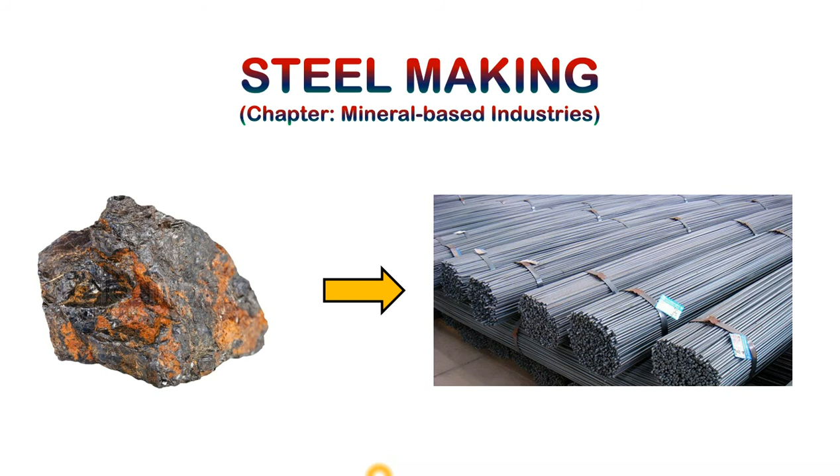Along with iron ore, some other raw minerals are needed for steel making that we will see in the coming steps. So steel making is done in the iron and steel industry. The iron and steel industry, as you all must be knowing, is the backbone of any country's industrial development, because this industry produces the iron and steel which is used by many other industries. So the iron and steel industry is said to be the backbone of industrial development in any country.

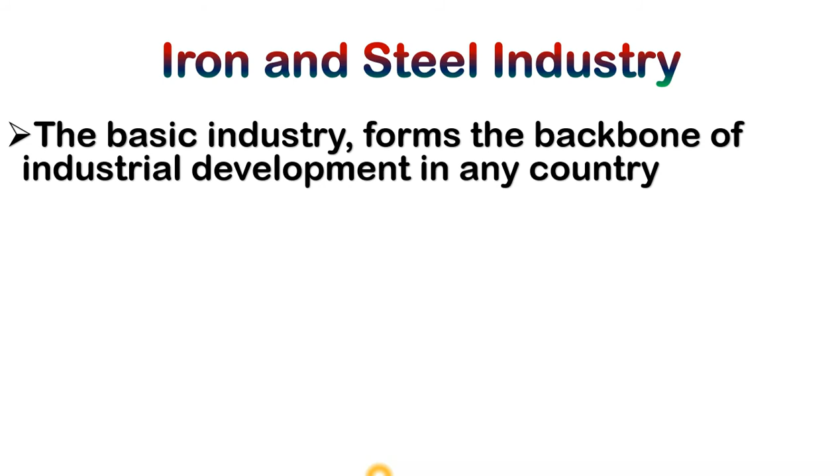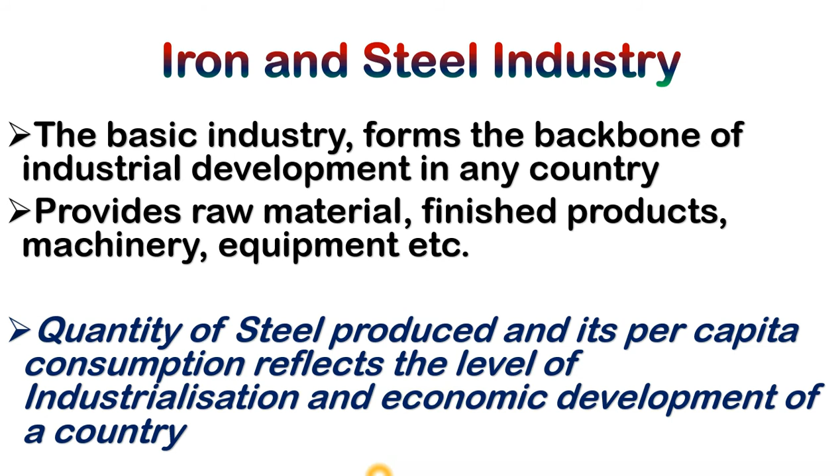So the iron and steel industry produces steel and iron products. Some of these are used as raw material in other industries. Some of these are finished products. Then many of these products are used for making machineries, equipments, and our day-to-day useful things, right? So the iron and steel industry is the industry that produces steel out of its raw material.

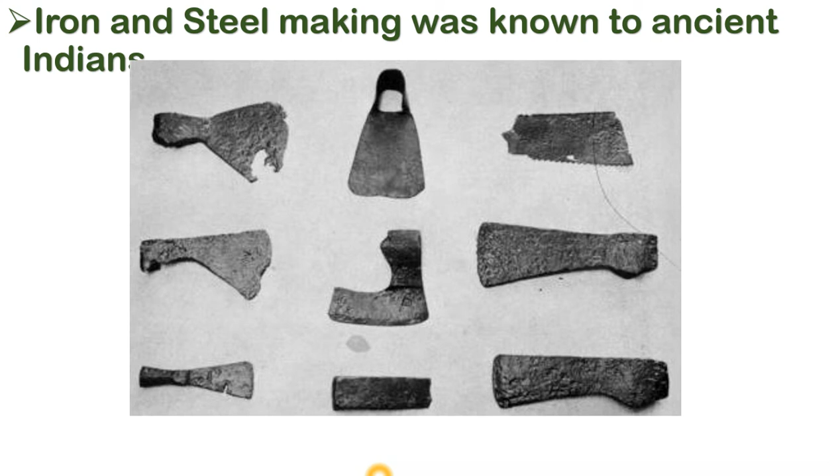Now, when it comes to steel or iron production in our history, ancient Indians, or people in some other civilizations, were also known to have used steel as well as iron products. Even though steel was not there, people were using iron equipments and machineries earlier. And during the Gupta period, we had iron pillars in North India, like the one in Delhi, at Qutub Minar.

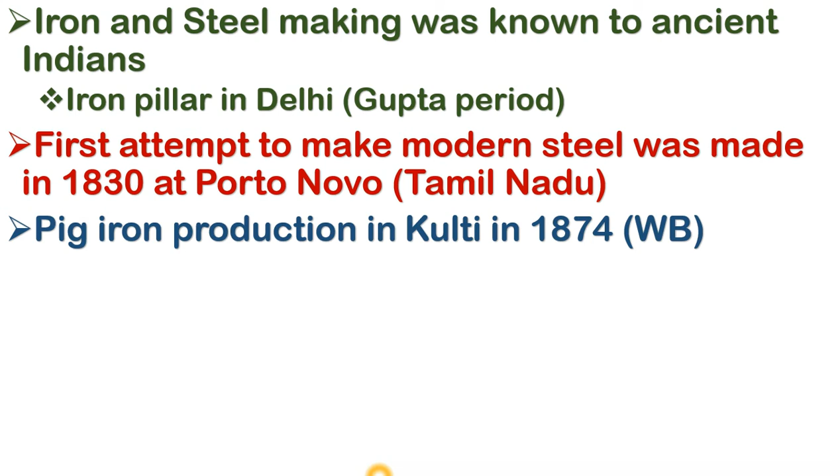And in 1830, one of the earliest modern steel making attempts was made in Tamil Nadu. Later, in the year 1874, pig iron production started in Kulti in West Bengal. And one of the earliest steel plants in India was set up in the year 1907 at Jamshedpur in Jharkhand. And presently, India is one of the largest crude steel producing countries in the world.

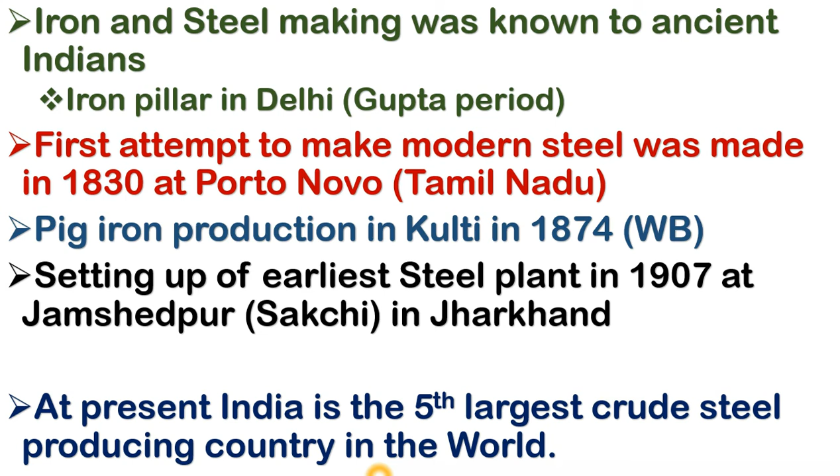Now let's see what are the raw materials required for steel production. There are a number of different kinds of raw materials required for producing steel, and the major raw materials include iron ore, manganese, limestone, silica, chromite, feldspar, scrap iron, flux, and fuel. Along with these, a little bit of manganese is needed for hardening and removing impurities. Then chromite, nickel, and tungsten are used for galvanizing. Galvanizing is the process by which steel or iron is made rust-free.

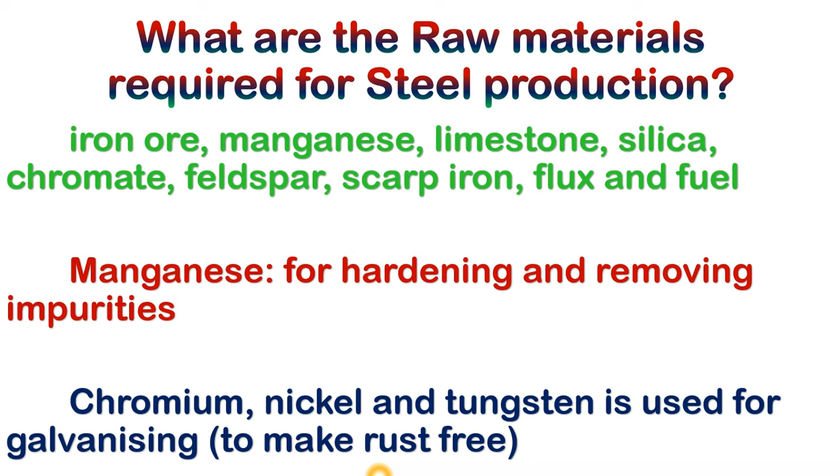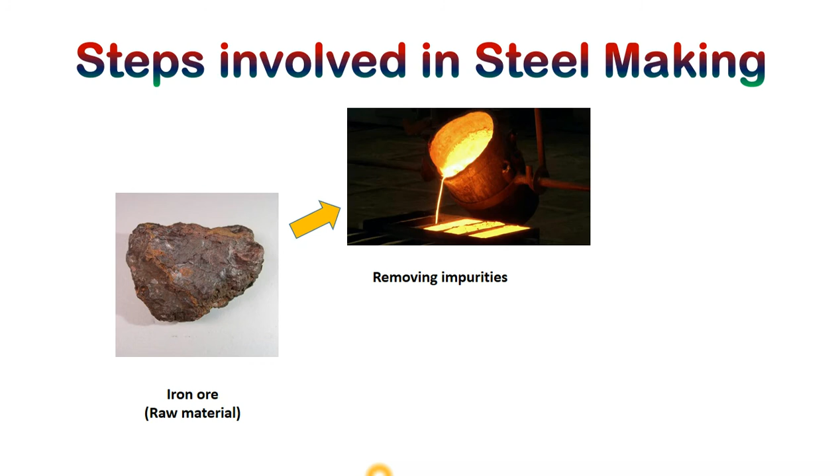Alright, so these are the raw materials required for steel production, and the production process includes three steps. These are called ore reduction, steel melting furnace, and rolling mills. Let's see what these steps are. The first step is ore reduction. From the name itself, you will get an idea. Ore reduction is nothing but the process by which ore and other impurities are separated.

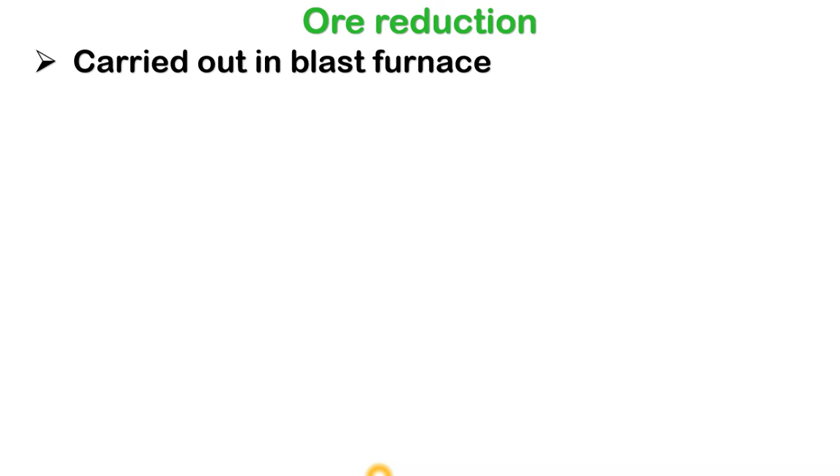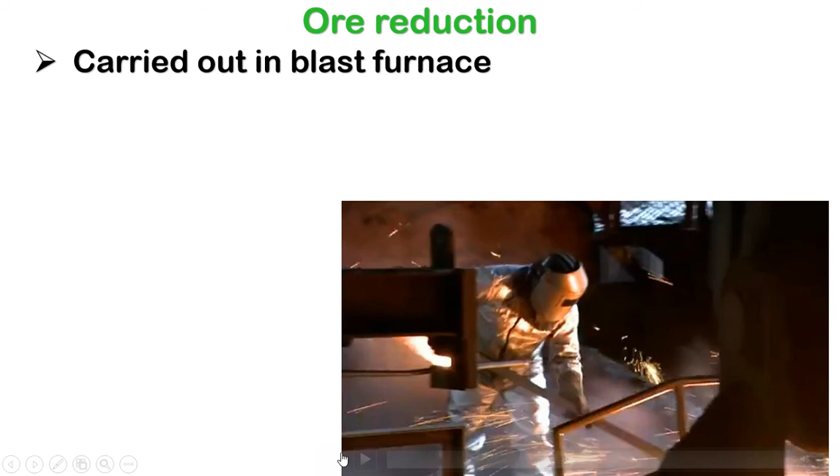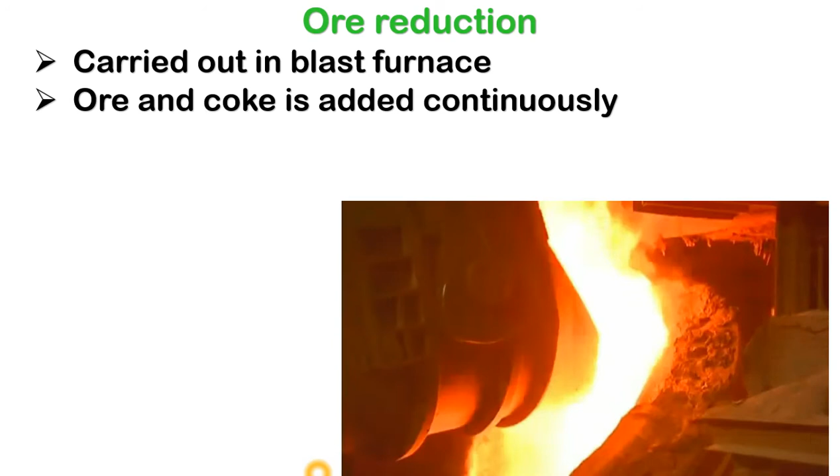So in this process, what is actually done in the industry is the iron ore is crushed into very tiny particles, small pieces. Then they are taken to a blast furnace. A blast furnace is a large container in which this iron ore will be melted at very high temperature. While melting iron ore, other ingredients are needed, like coking coal, and a little bit of limestone and dolomite is added as flux to reduce the melting point. So there are a lot of chemical reactions happening inside the blast furnace. Through this process, iron ore and other impurities are separated.

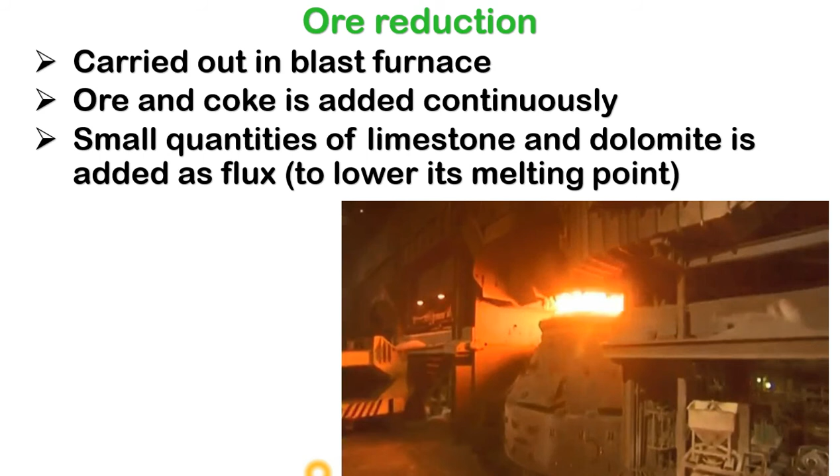So as you can see in the third sentence, limestone and dolomite is added as flux. Right. So when limestone and dolomite is added, the melting point decreases, and slowly that leads to the separation of impurities. Impurities will float on the top. That is what is called as slag.

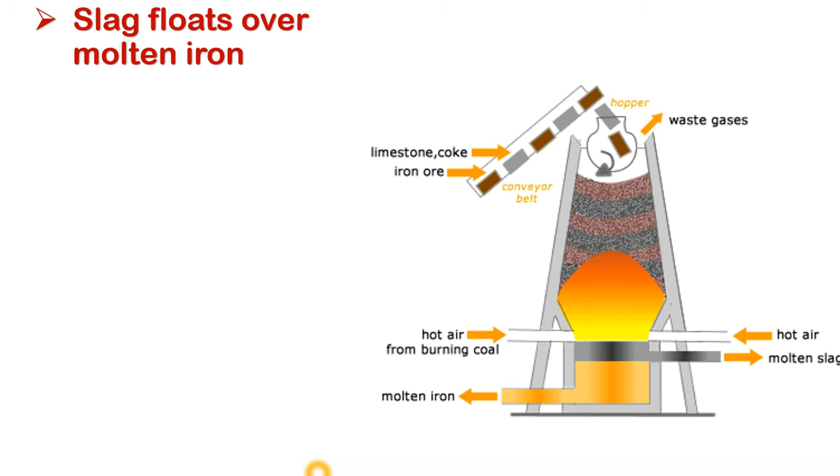So on the right side, you have a photo here that shows a blast furnace. Right. So it is burned here. This ore is melted at a very high temperature. So when it is melted at very high temperature and flux is added, they will get the impurities floating on the top, and the molten fresh iron, that is what is called as the pig iron, will get collected

at the bottom. Then the pig iron is separated. That is what we need for the further processes, and the waste or other impurities are again separated. So this process continues, and from the bottom the pig iron or the molten iron is separated. So this is what is done in the first step. Right? In ore reduction, the ore is separated, and from the ore, molten iron or the pig iron is separated, and impurities got separated, and that is discarded properly.

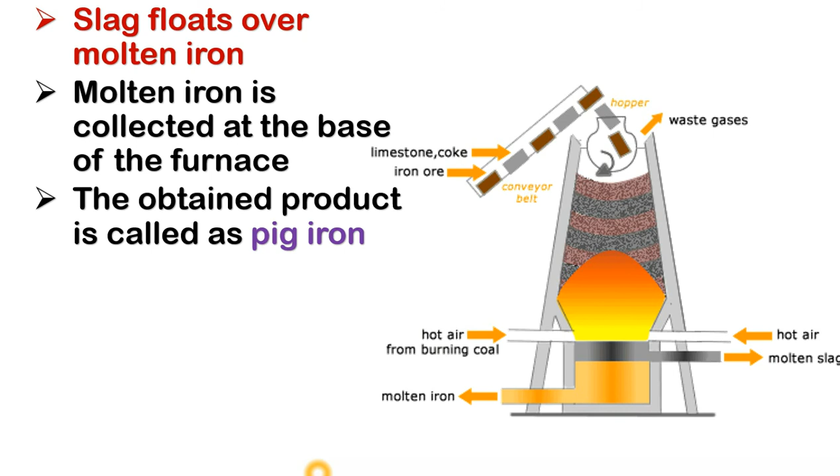Alright. Now the second step is steel melting furnace. That means pig iron, even though it is a pure iron, it will have a little bit of impurities. There are up to 5% carbon and other impurities in pig iron. Right? Pig iron does not have any connection with the animal pig. Pig iron is nothing but the pure form of iron with very small quantities of impurities. Right? Impurities in the sense other minerals.

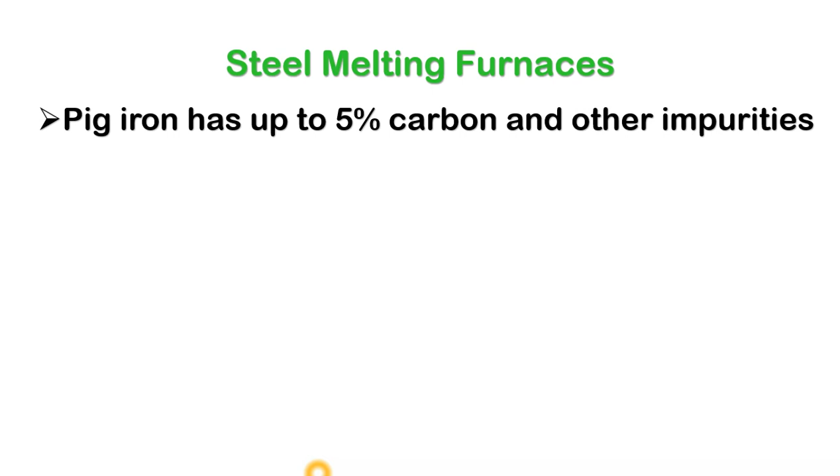Okay. Now, the next process is steel melting furnace. In this process, through deoxidation, the remaining impurities like the carbon and other impurities are separated. That is what is done in the second step. Right. After that, this pig iron, now free of all kinds of impurities, is converted into steel or into cast iron or into wrought iron by adding minerals like manganese and other kinds of minerals. So this is what is done in the second step.

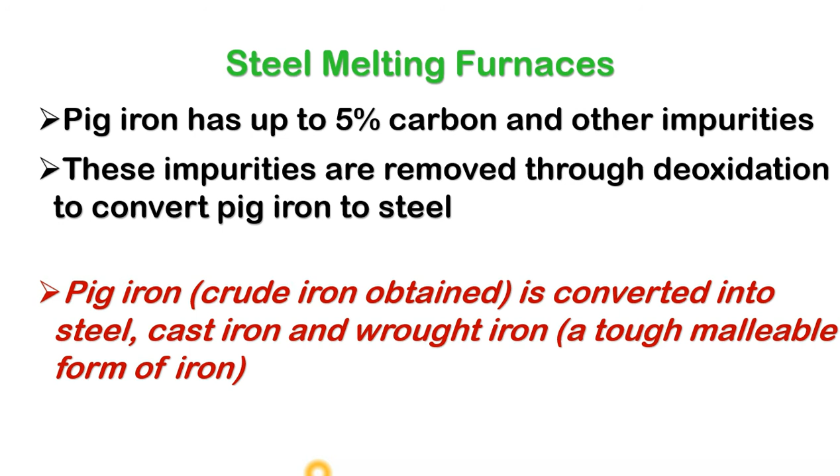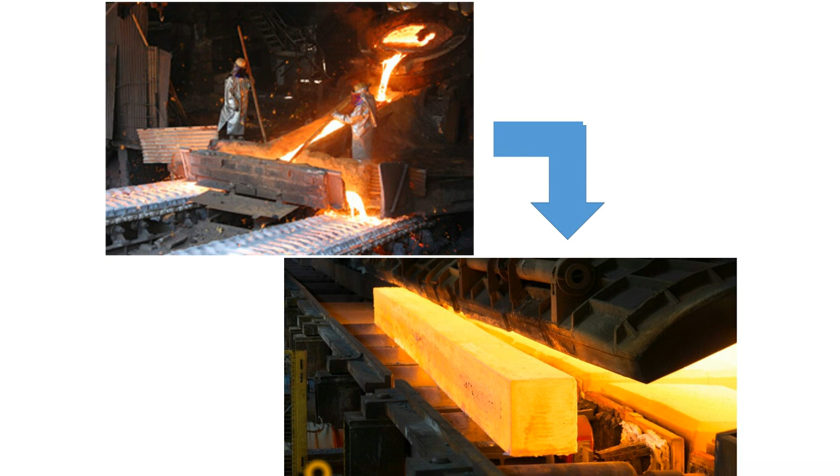Now, this steel at present is in molten stage. Then it is cast into an ingot. Ingot is nothing but a slab-like shape. Right. Now the third step is converting this very hot molten slab of pig iron into steel. That is the third step, and the step is called rolling mills.

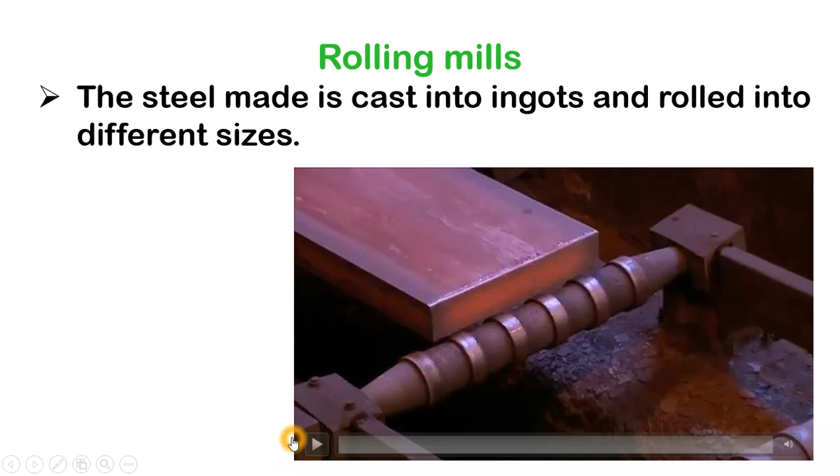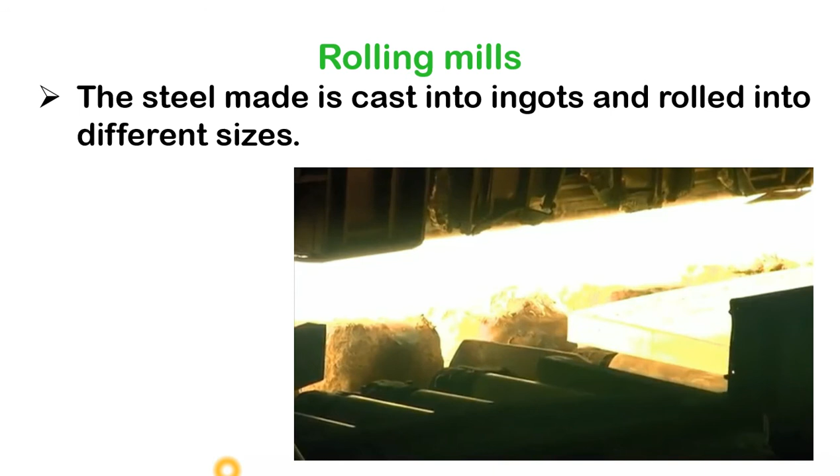So in rolling mills, these ingots are rolled through a number of different rollers. Right, rollers are nothing but machineries or equipment that convert this molten pig iron slab into the required size and shape. Right. So this molten slab is allowed to pass through the rollers. Rollers will compress it to the required size. Then by watering, the temperature is reduced, and finally it is converted into steel.

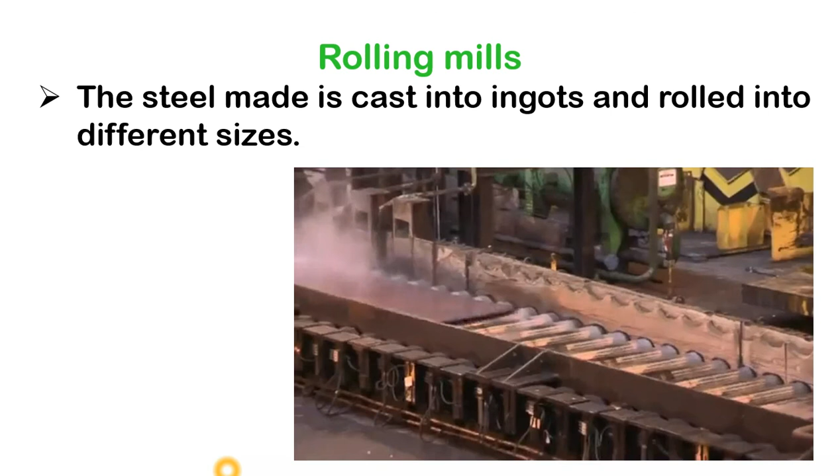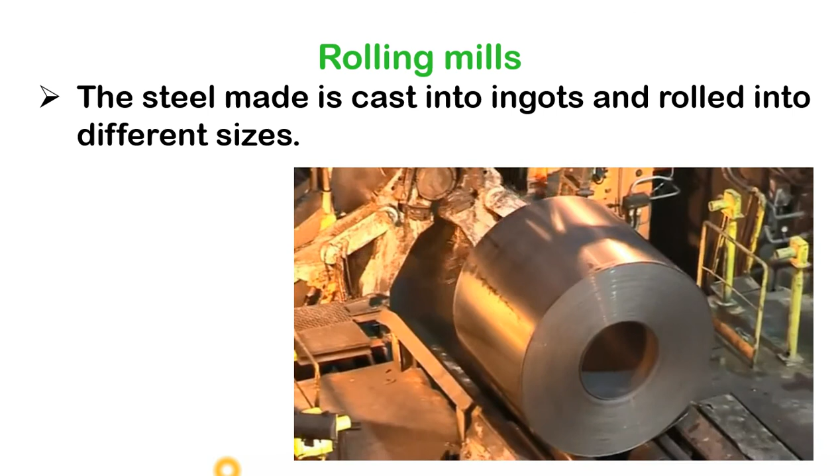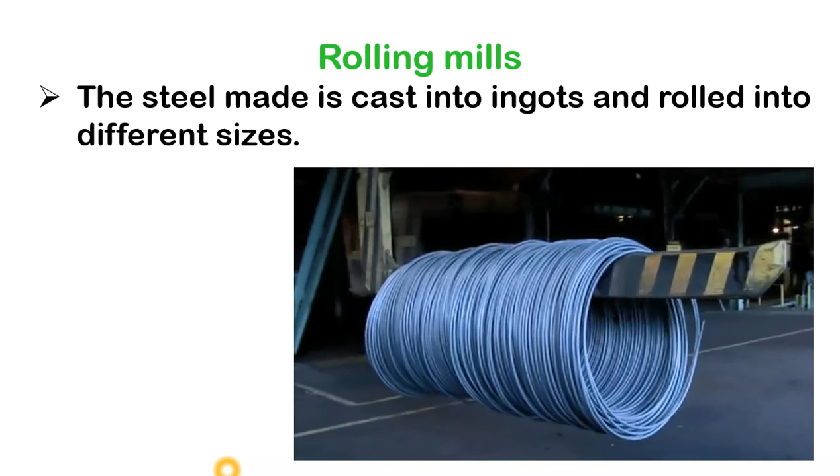And this steel is rolled into rolls, and then they are ready for selling. So these processes are done in the last stage, that is the rolling mills. Once the steel is ready to sell, the steel making process is completed. Now we have our finished product, steel. This steel is sold to other industries or for some other purpose, and those industries convert the steel into different kinds of user products. So these are the three steps involved in steel making.